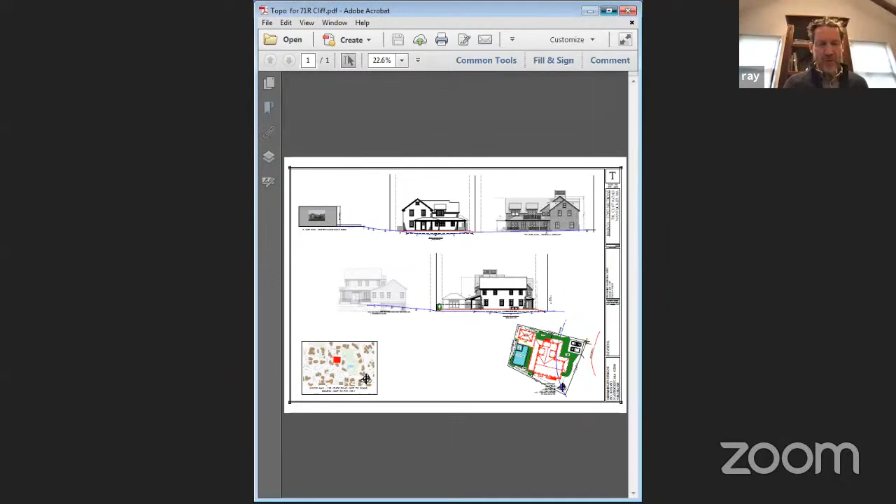Okay, so first thing on the agenda here is the dwelling that we reviewed Tuesday night. And Brooke, I know that you provided some supplemental information, which we received via email. Why don't you walk us through it? All right, need to share?

Okay. So I've never done this before, Brooke. No, I guess, oh perfect. All right. So you've seen the house already.

The information that I brought in is a topo study showing transverse cross sections east-west and north-south. And what you're looking at here is the view from the way, and the blue line represents the existing grade through the property, and then we've got a red line that indicates what's getting filled in that area.

To the right is a drawing, a design that was recently approved for 69R Cliff Road. And then to the left of that is 71 Cliff, which is a small ranch style building that sits up on Cliff Road. And then, of course, there's a bunch of vegetation between those.

And then on the second structure, this is going from east to west, and there again you've got the blue line with the low point being at the 34-foot topo line and rising up, and this is one Hamlin Road in the background, which shows more or less what the grade line would look like. Their driveway is at the 36 topo, and again, the red line indicates where our finished grade would be, which is at the 37-foot topo line.

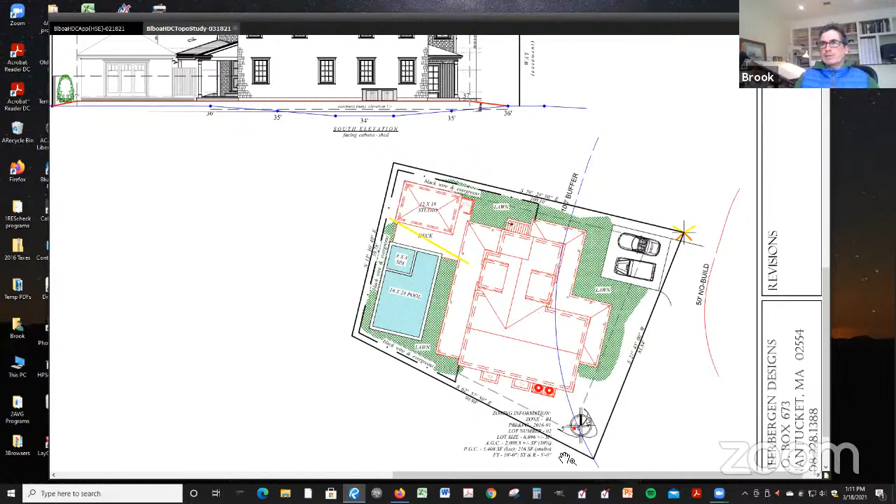I also want to make one more note that when you look at this building in the site plan, it does look like it consumes a lot of area, but a lot of that is covered porch. So if you're standing out here in the way, you will be looking through a lot of this area, and the actual building has a relatively small perimeter. Again, it's 1,400 square feet on the ground, which I think is a pretty modest structure. So that's the topo study. I can leave that up, and I can also go back to the designs as well at whoever's request.

Okay, thanks Brooke, thank you. I'm sure HDC didn't have anything to say between Tuesday and now. So whoever wants to speak on this application before we get it to the board members, unmute yourselves and announce your name for the record, please. That is, if anyone wants to speak on this.

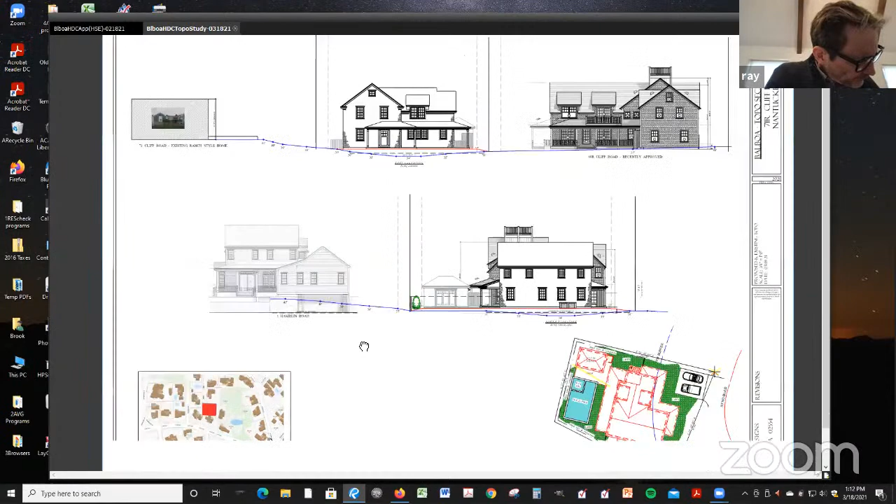Hello? Yes, sir, my name is Heather Lamb. Thank you for calling me. Our house is 73 Cliff Road. You didn't mention it on Tuesday or today. It's pretty - well, I know we're not on the pool yet. Not yet. Okay, so I just wanted to make myself present that I am an abutter and I wasn't on your original list. So thank you for hearing me.

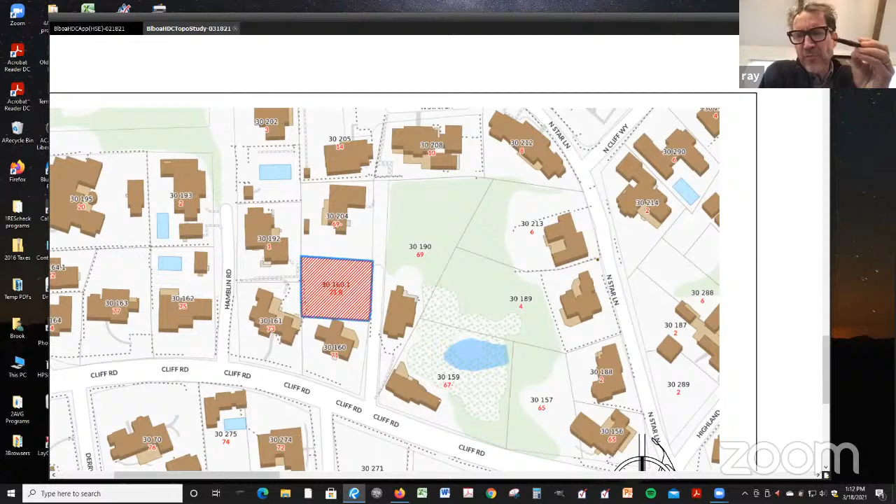So right now we are reviewing the house itself. Then we have two other applications that are following that, the pool being one of them, if that's where your concern is. Thank you, yes. Okay, so we can get back to you on that, okay? Okay, thank you. Great, anyone else?

Mr. Chair, my name is Karen Padilla and I'm an abutter from 69.5 Cliff Road. I'd like to understand the water runoff and how they plan to capture that and take care of that with this new house. Okay, I'm actually glad that you brought that up because a lot of the discussion on Tuesday had to do with runoff, which is something that this board is not in charge of.

We are in charge of grading to the extent that it elevates the house, but in terms of the runoff, that's not our purview. So if Brooke wants to respond to that in any way, I would welcome him to do so, just in the interest of being neighborly.

Sure. So if you look at the topo line, there's really only about a foot difference between our highest point and about the midpoint of your lot. And I think right now the water goes to that wetland anyway. In terms of drainage, that's definitely a question for a soil engineer, and I cannot answer that fully accurately. I can only speak to the relative size of the buildings and the designs within the context of this area.

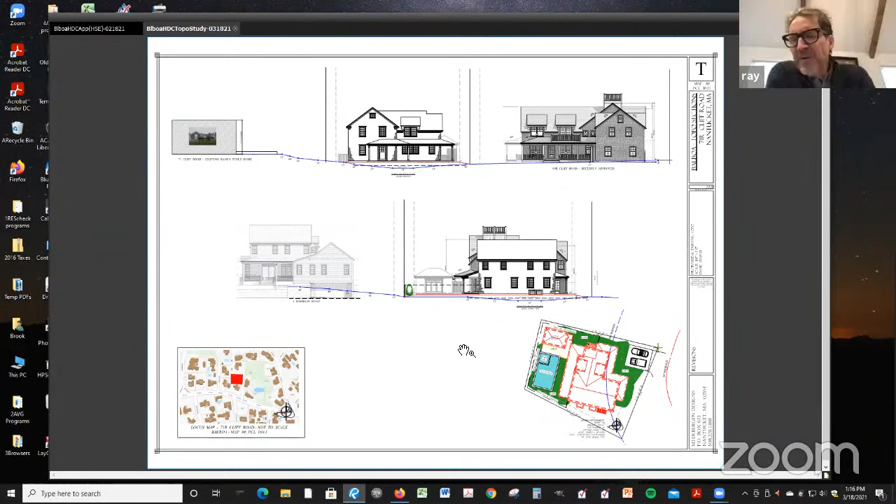Okay, thanks. Anyone else? Mr. Chair? Yes, Mr. Chair. Oh, hi, Arthur. Arthur Reade, representing the Braylowers at 1 Hamlin Road, and also representing Richard Griffin at 69. I would echo what Ethan said, and -- somebody needs to mute, please. Arthur has the floor right now.

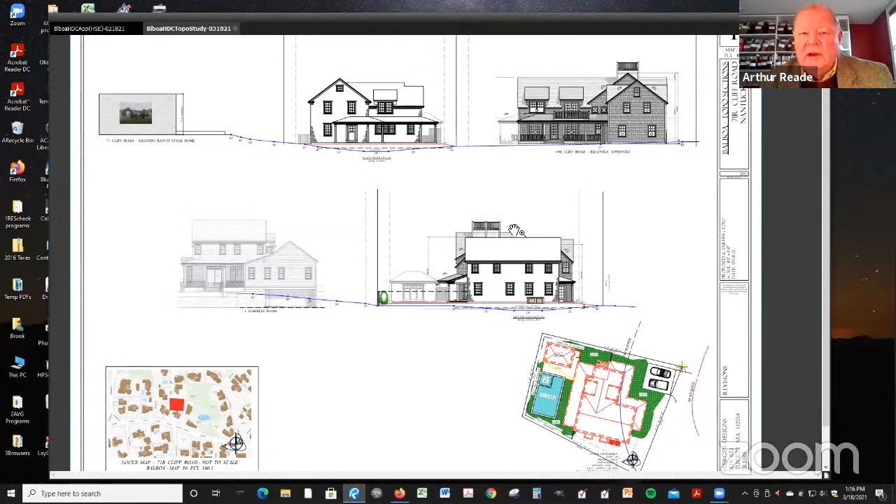In addition, I'm concerned about the grade change. Looking at this, it's not a huge amount, but the grade is certainly being raised, and I don't know any reason why it couldn't be kept at the lower elevation where actually most of the lot is now. If you look at it from either side, rather than building it up, can't we either go to the lower elevation or average it in some way? Is that it, Arthur? Yep. Okay, thank you.

Anyone else? Mr. Chairman, this is Salil Patir from 69.5 Cliff, north of this property. Just going back to your remark about HDC not being the place to raise concern about the surface and roof runoff.

Correct. Where can we raise that concern if this is not the right forum to do it? Well, it would have been the Concom, which is why I raised the issue of the Concom. But like Ethan said, this wasn't really brought up at that point, and this is the first time we are seeing these drawings. But apparently the issue of runoff was raised -- I believe somebody said that.

Ethan, did you say that? Yeah, just to clarify, we did bring it up as one of the points as part of the Concom process, though they really didn't put much importance on it because it was outside the 50, and they felt it was largely between the 50 and the 100. It's not something they put as much concern into, unfortunately. I don't know if it's a failure of the process or what, but again, looking at the boundaries, it wasn't something they really put a lot of concern into. Okay, thanks for the clarification, Ethan. I hope that answered your question, sir.

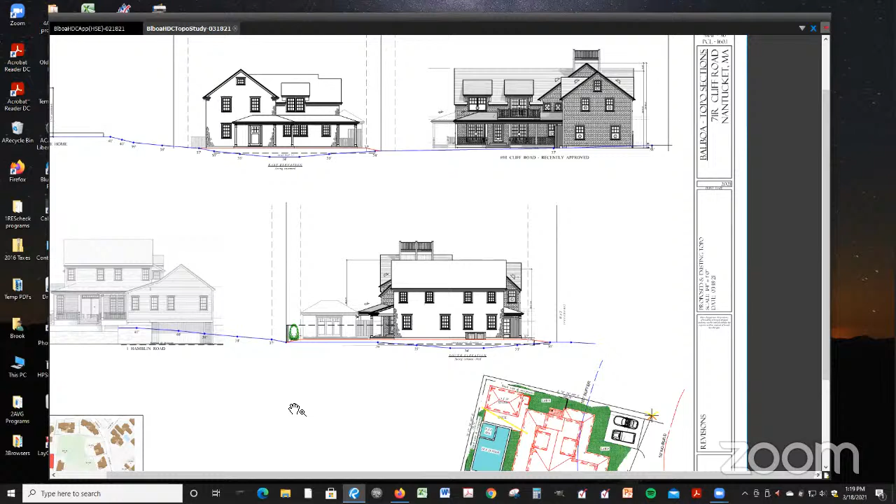Anyone else? Hi, Meryl and Meryl Bralower. I'll share my video. Hold on, let me just mention what we mentioned last time. We think that the scale of this project doesn't fit the neighborhood. And that's all I'll say for now. Okay, thank you very much.

All right, anybody else? Otherwise, we're going to get to the board members.

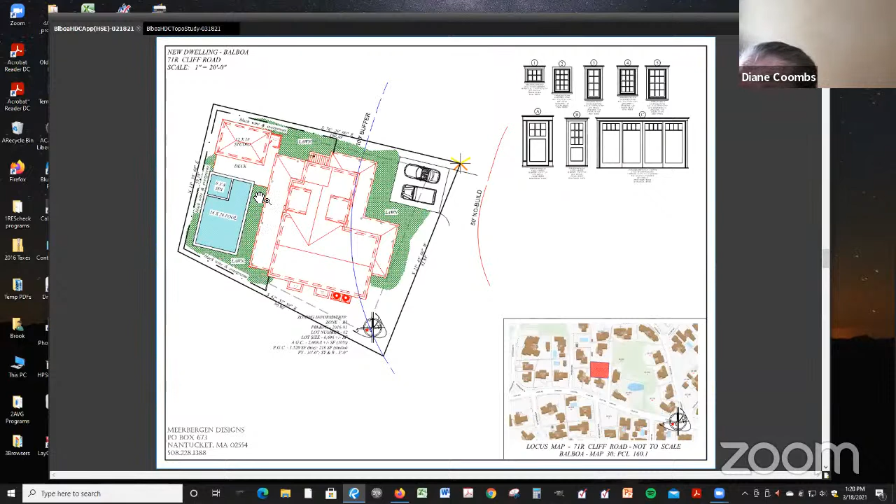Even though the porch is around, we've got the air conditioners, I would guess what those red circulars are. That's what those are. On that, they are very close, they look like, I don't know, 12 feet from the lot line.

I would like to see the pool reduced. I would like to see the studio reduced. And I feel that the main building should go back, perhaps not so much room given to decks and porches. I understand that it's good and they look through, but when you see the amount of land that is left, again, I've been trying to follow the square footage of this, and it comes down to being

almost the full allowed square footage. I would like to see it reduced somewhat, so it's going to be seen from several streets, and it's in a funny corner down a driveway that is a public passing, and we have to consider the house itself is fine, lovely, but it is how and where it is set on the lot that I'm concerned with.

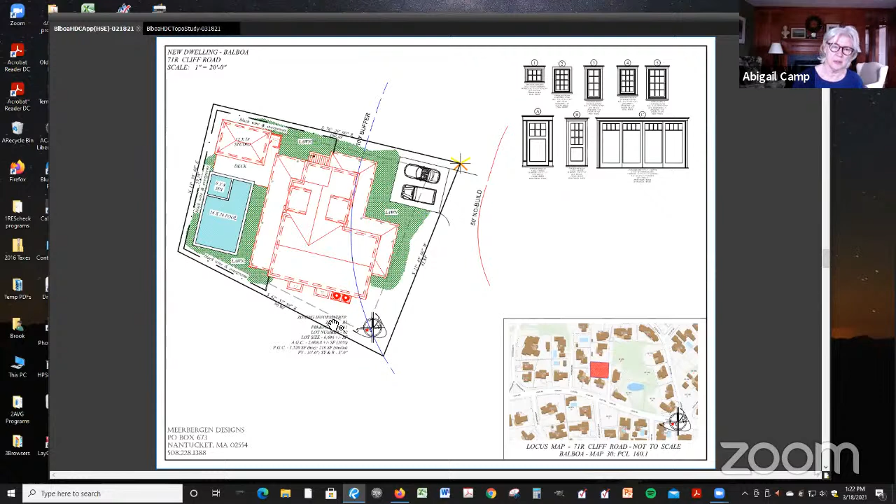So with respect to the architectural elements, sizing and massing, I think the design itself, the fenestration, the general elements are perfectly approvable. However, I think the overall massing is problematic in terms of the setting.

I note that this, as we've discussed, does go almost lot line to lot line. Whereas in the neighborhood, if I'm reading this correctly, 69 R Cliff, which is to the north, and then the homes surrounding really aren't lot line to lot line, although they do come up close to at least one lot line. And I think it would be appropriate for this building to be along one or more property lines, but not to straddle the entirety of the lot.

So that's the overall size. With respect to overall size or perception of overall size, I do agree. I think there was a general comment made yesterday about the grading. I'm not going to speak to water runoff because it's simply not our purview, and it's problematic when we talk about things that aren't in our purview.

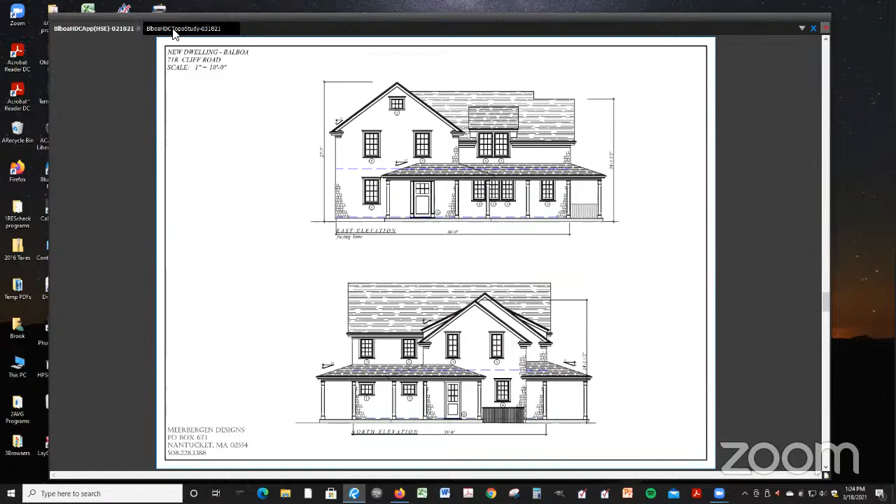But I do believe that if 37, it looks to me that 37 is arbitrarily somewhat chosen, perhaps with respect to beneficial water runoff for the particular property. But it would seem that 36 would be just as appropriate, allowing a little bit of retainage along the southern end of the lot, if I'm reading these documents correctly.

Dropping this down a foot would help, I think, as a trade-off with respect to keeping the overall massing as it is, at least in my mind. That's a foot off, and I think that's beneficial. And I think those are my comments for now. I'm not going to speak on the pool, the cabana. I think they're incidental.

Thanks, Stephen. Gary. I agree with the other commissioners to the extent of the architecture. I think this is a perfectly appropriate building style. I think the massing could be reduced a little because of the lot size, because of its location centered where it is. But architecturally, I have no issues with this building.

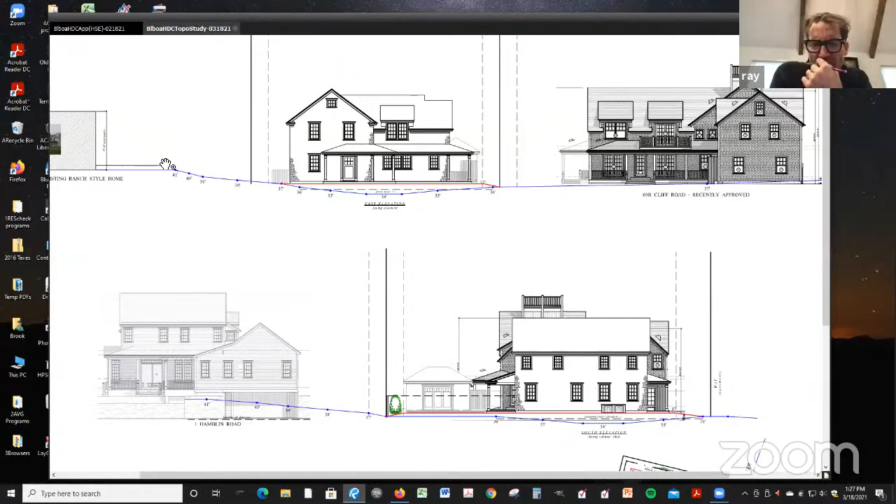Can somebody make a motion on this one? Make a motion to hold for revisions. Thank you, Diane. On that motion: Abby, aye. Stephen, aye. Gary, aye. Diane, aye. And I'm in favor. Motion carries.

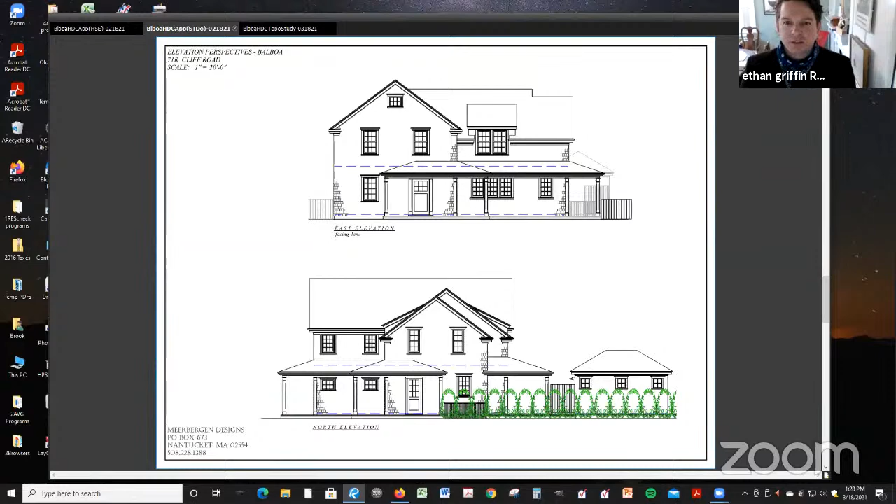Anyone? Ethan Griffin: I think this is a completely fine cabana studio. What's going against it is the overall density of the lot. Anywhere else on the island, beautiful, it would probably go on consent. But just on this site, it's difficult in comparison to the rest of the development. Thank you, Ethan.

Anyone else on the studio? Go ahead, Merrill. I agree with the commissioner who suggested a shed. I think that's much more in keeping with this particular lot.

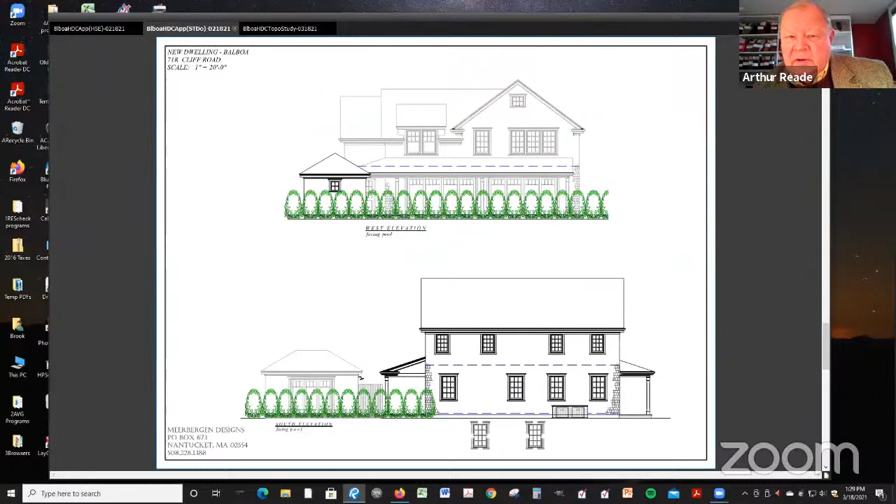Go ahead, Arthur: I have the same comment as both Merrill and Ethan, in one way or another. There's nothing wrong with the structure per se in a vacuum, but when you apply it to this lot and the extent of the very aggressive program being proposed for this very small lot, I think it's a bit much. They're basically trying to cover the entire lot, or as much of it as they can. I think it could definitely be cut back to the shed that I assume it's really intended to be, for purposes of maintaining the pool and equipment.

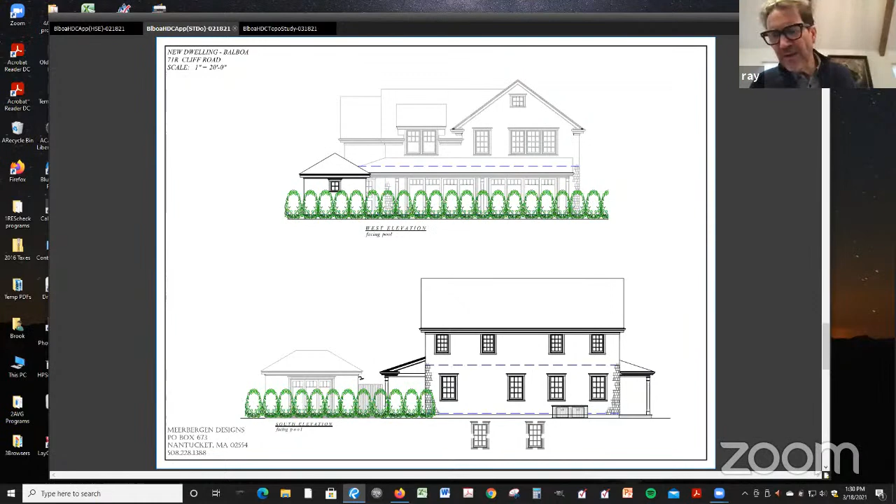Thanks, Arthur, anyone else? Okay, I'm going to turn this over to the board. Interestingly, whoever made the comment about it being a shed—I immediately jumped right to zoning shed, as we know it, which means it's exempt from ground coverage and can be no more than 200 square feet, which I think this is slightly above. So who would like to start the discussion on the cabana?

I'll go, Mr. Chair. My only comment is I think it's perfectly approvable. Given our purview with respect to setting, it's such a small building, and with the hipped roofs it's not so imposing, so it would be appropriate. I do think it would be beneficial—these are probably 7-foot doors—to take 4 inches off the top, or lower the top plate a little bit. I do think the south elevation, although not visible, shows the door heights look a little out of proportion. And on the east elevation, which may be viewable at some point but perhaps not if there's fencing, the door height is masked by that outdoor shower element. Those are my comments.

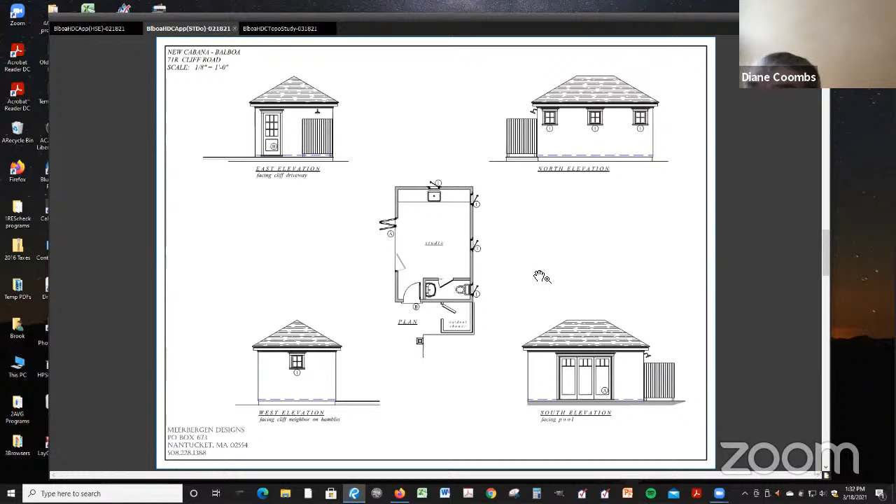Thanks, Stephen. Diane, are you ready? You'd already made some comments about the shed—why don't you reiterate those? I would like to see it at shed size. I think the zoning shed size is certainly a concern. The south elevation and north elevation can be less wide. It's supposed to be a john, a sink, and I don't know what else except sliding folding doors. The building needs to be made smaller.

Those are the sides that can be done. The window there is fine, it goes underneath, and the bushes cover the lower part that has no windows in it. But I would like to see it made smaller, or go to a zoning shed.

Okay Diane, thank you. Carrie? Sorry, I was muted. I think I agree with Stephen's comments about the doors. It makes it seem a little bit disproportionate with the size of the building. It is a small building, but the zoning shed can be 10 by 20, and nobody would want that, because I think this is 12 by 18.

Is that right, Brooke? It could be 12 by 16, and that would meet the letter of the law for a zoning shed. And it would be easy to drop the plate height and drop the door height, and I don't think that would make much of a difference - some nuanced deductions, but I think it would help. That's all I've got.

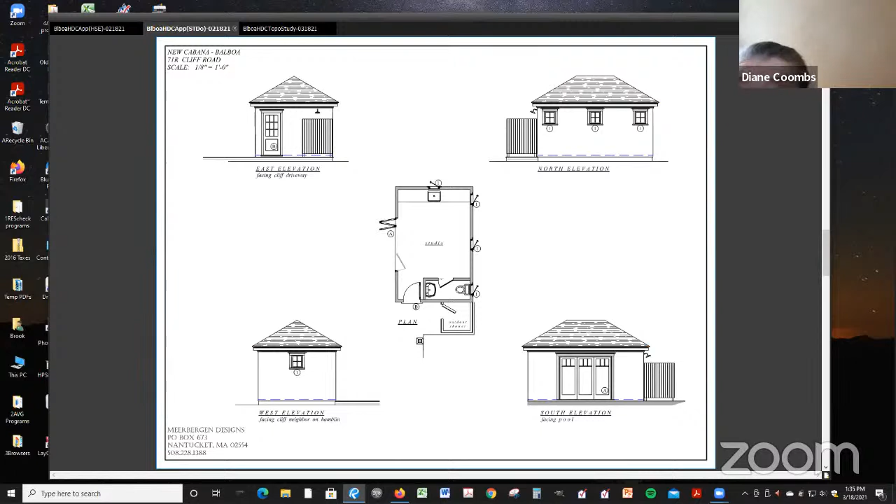Now let's look at the pool. I'm not sure that you need to go into any great length of description of the pool, Brooke. No, it's a pool. There you go.

At grade, right? At 37? It was grade 17, I would guess, right? 37 is the grade - 37, I'm sorry, 17, 37, 20. I think we negotiated down to 36. 36 and a half, that was the negotiation. Wait, did we say 35? 36 and a half, Steve.

Okay, so Brooke has given the briefest description ever of his pool application. So now I'm going to open it up to neighbors, and I know one neighbor in particular wanted to speak. Was that Heather Lamb that wanted to speak on the pool specifically? Yes, thank you so much.

The pool lines up right along our whole property line, and our house is the smallest of all the area. It's worrisome that it's 5 feet from our property line, where we get together every night, cook out, deck, all that. I know I can't bring up drainage because you don't consider that, but the closeness to the property line and our house - it would be about 10 feet from our house.

So that concerns me. You're at 71, correct? I'm at 73. Oh, 73, I'm sorry, I was confusing you with 71. Sorry about that. Okay, so we have a very small, where your arrow is, very small little grassy plot there, and that's where the side of the pool is, and I gather it's 5 feet from the property line.

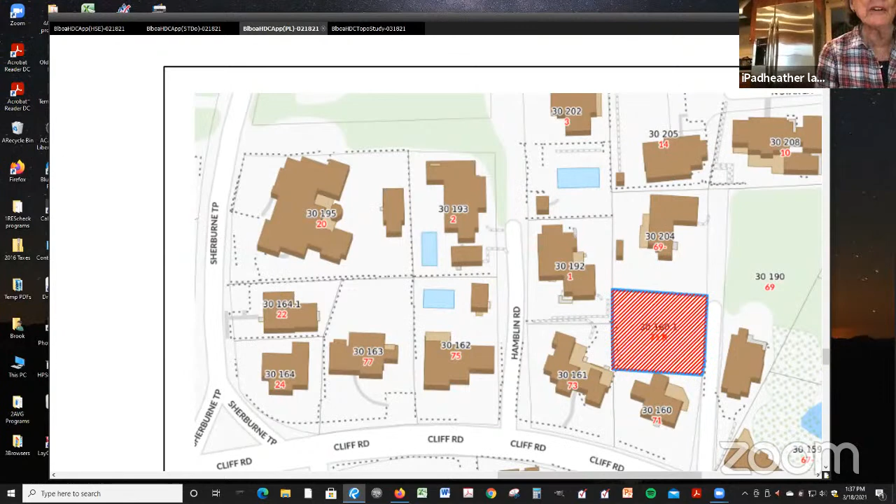It is at the moment. Okay, so that's what we would look at too, every night, every day, and hear noise - noise always travels from a pool. And also our house is the lowest house of the point all around. We have major - I know I shouldn't say drainage problems, but we flood all the time. So that obviously all worries me.

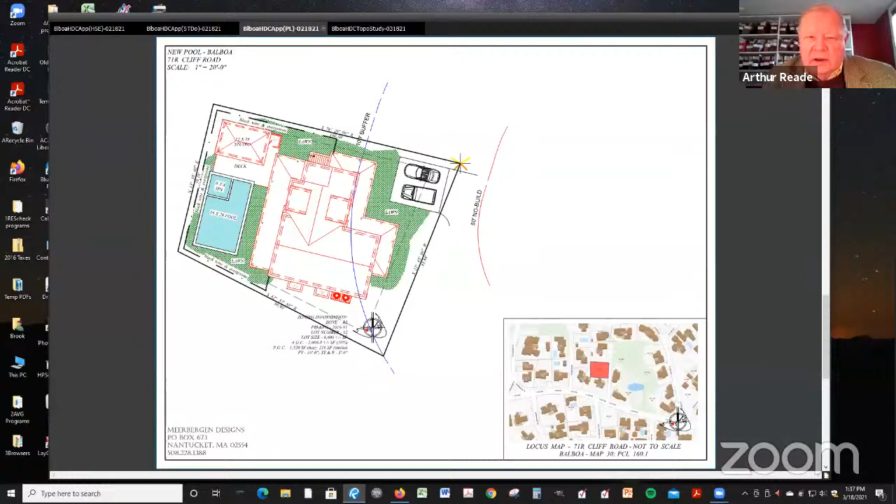Thank you, okay, thank you, Mrs. Lamb. Anyone else? Yes, Arthur - again, representing the Braylowers who are at 1 Hamblin Road. As you can see from the site map that was up a minute ago, there's a clear shot view from Hamblin Road between the Braylowers house at 1 Hamblin and the Lamb house at 73, shooting right up at the pool.

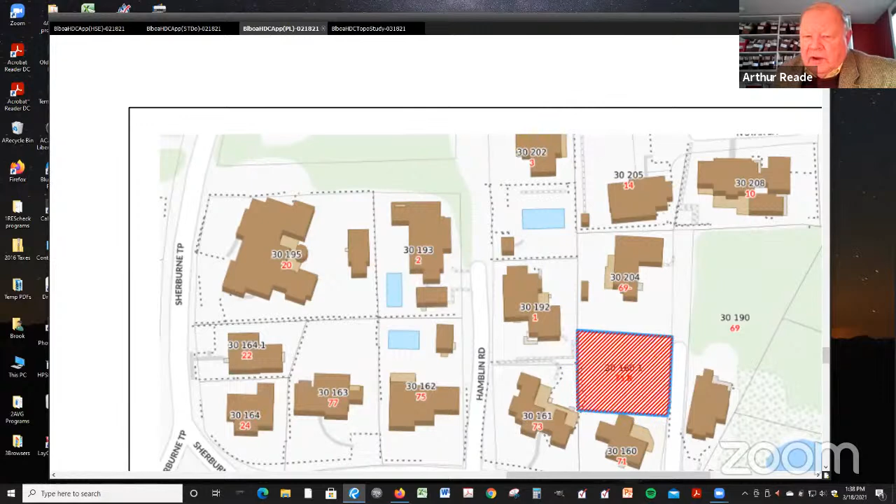It's going to be highly visible from that point, and I think my clients, as Mrs. Lamb, are also very much concerned about the effect it'll have on them. But I think it'll also have visibility and an effect from the way, Hamblin Road. And it's a large pool, up very close to the lot line. Again, as every other aspect of this project, it's just a little bit over the top for this little lot.

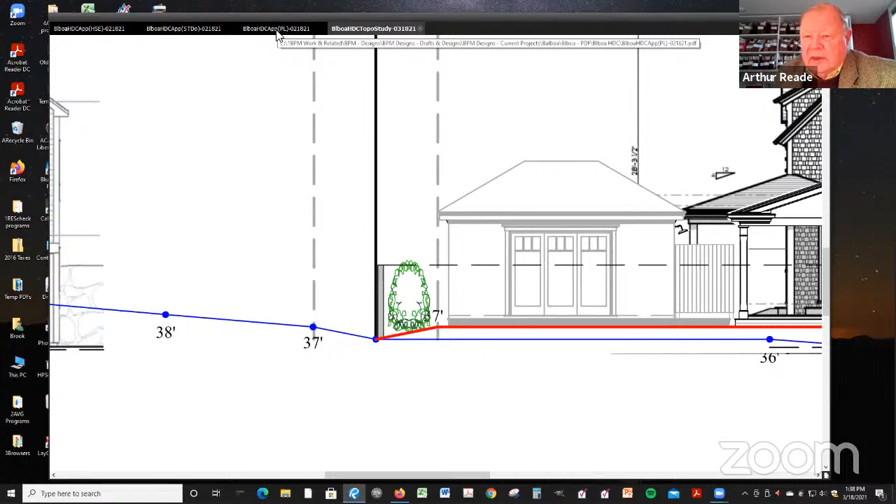Anyone else? Mr. Chair? Yes, Ethan Griffin.

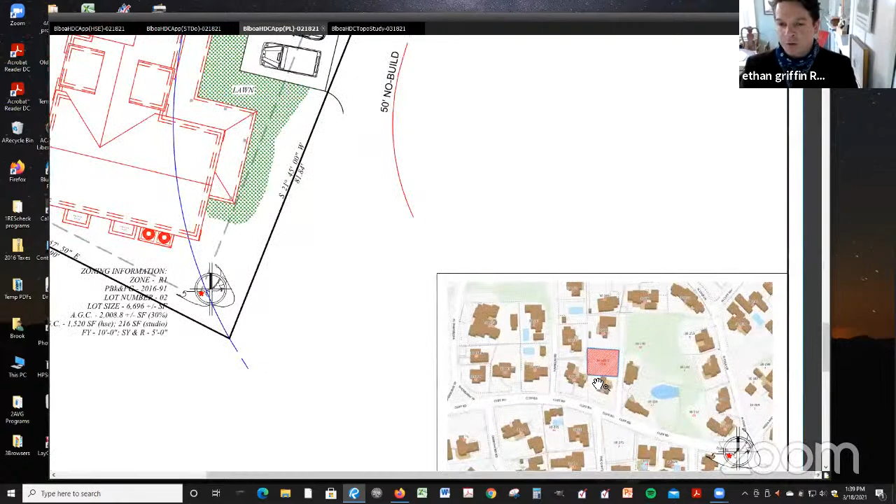I think what's also particularly illustrative about the locus map that was just up is examples of, certainly there's other pools in the neighborhood, but again, looking at the proportion of those pools to the size of the lot, to the size of the main structure and the accessory structures, I think that should establish at least a sort of a design baseline for appropriateness that the applicant might want to look at further.

The only thing I would add is that during construction, we would be very appreciative of having some kind of construction fence, as I'm sure the other neighbors would, because it is so close to our property and to everyone else's that all the debris and difficulty from setting something up on that smaller lot is going to impact us dramatically. So that would be one thing we would ask you to consider.

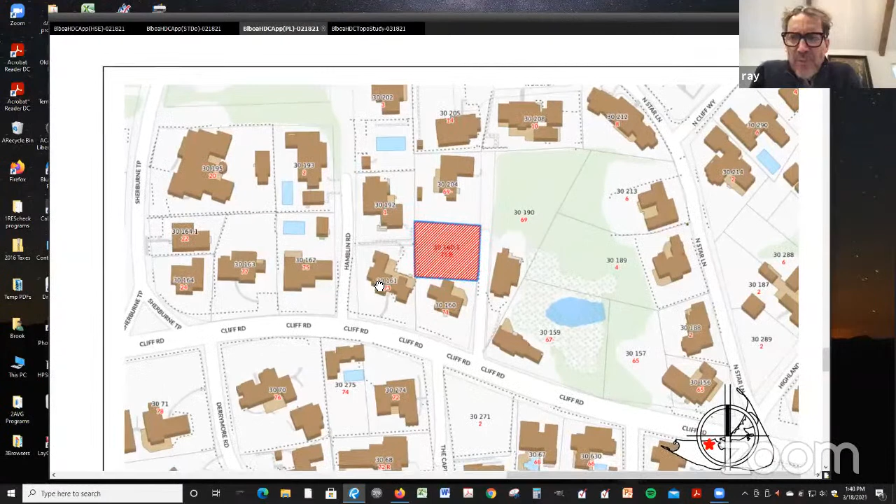Well, that's not our purview, but I can tell you, I'm in the business. I'm an architect, and if you're digging a pool or a foundation of any kind, the first thing any builder is going to do is put up a fence, so that the liability of somebody falling into that excavation is reduced. They need to do certain things per OSHA to keep the site protected from things like that happening. So I guarantee you there's going to be a fence up there probably throughout the entire process of the construction.

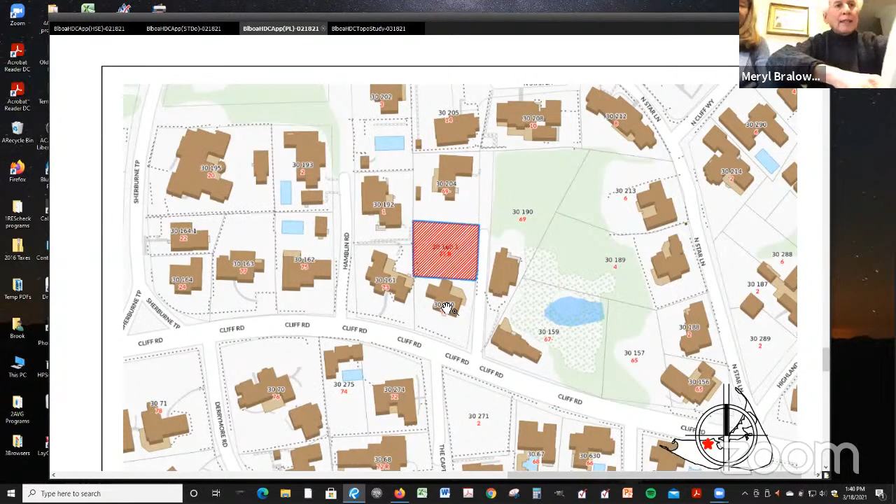Meryl Bralower: I would just like to reiterate, again, that the size of this pool relative to the lot seems inordinately large. And I think the whole lot and all the various buildings on it have to be taken into consideration in terms of scale. And if anything is totally out of scale, it's the size of the pool compared to the other two structures.

I have one other question. On the plans, they mention a hedge of evergreen trees behind the pool and the studio, and then some sort of black fence as well. Is that in your purview as to what's going back there? Yes, it is.

So I'd like to know a little bit more about what they're planning in terms of protection from the pool itself for abutters and any grandchildren or children, et cetera, and a little more discussion of what they're planning on using in terms of the type of trees, as well as what kind of fence. I just mentioned a black wire fence — whether that's going to go outside the trees, or inside the trees towards the pool side.

So some of that I can answer for you right off the bat. The wire fence, which is a requirement for code unless you have a pool cover, which I won't get into, is 4 feet high. It's hidden in a privet hedge, which presumably this would be, and goes on the inside. So it's not next to your property, it'd be inside of their property, and you'd have a hedge between the fence and you. But the rest of it, perhaps Brooke could address.

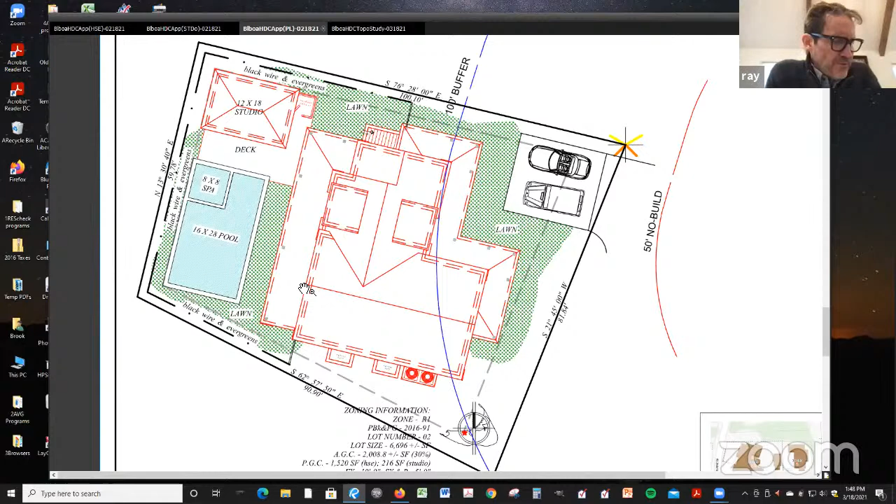Carrie? I'm in complete agreement with Stephen, I was thinking that myself. If you can rotate it, reduce it quite a bit and rotate it, you could preserve a whole corner of the property to buffer from your neighbors. And I think with a fence and evergreens, it will be screened nonetheless from Hamblin. But that's it, nothing to add.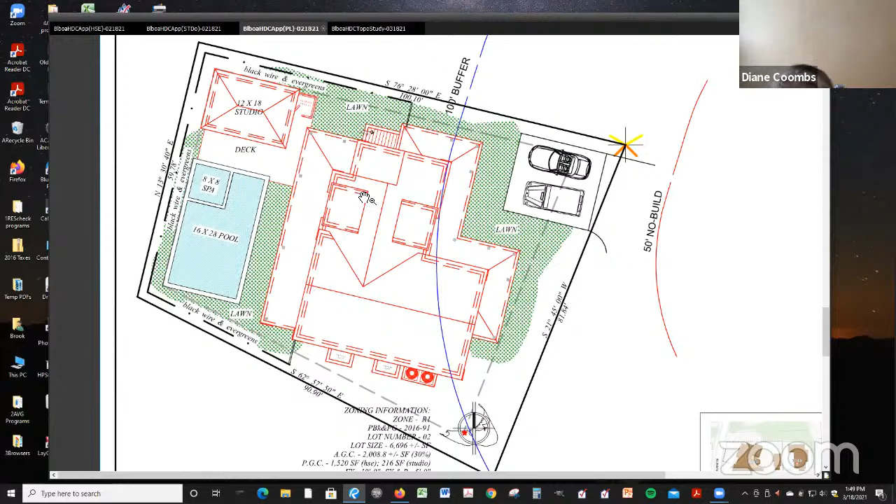Can I have a motion? Motion to hold for revisions. Oh boy, well weren't we charming? We're going to give that to Abby's motion. So on Abby's motion, Diane? Aye. Thank you, Stephen? Aye. Thank you, Carrie? Aye. Abby? Aye. And I'm in favor. That motion carries. Thank you, everyone, for your comments, we'll see you next time. Thank you, Brooke. Thank you.

Okay, moving right along, we have Mike Duffy. Is he with us? That was Michael missed Tuesday night. Yep, Michael, Mr. Chair, are you with us? Yep. So you have 2 strikes against you so far. No, I'm here, Mr. Chair. No, but you weren't here Tuesday. Oh goodness, yes, Tuesday, yeah, I do sincerely apologize. Shame on you. Okay, so let's see what you have.

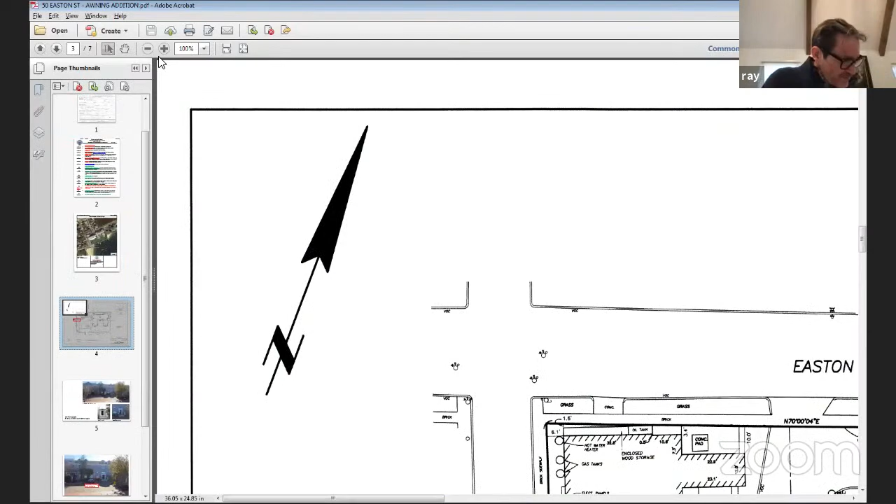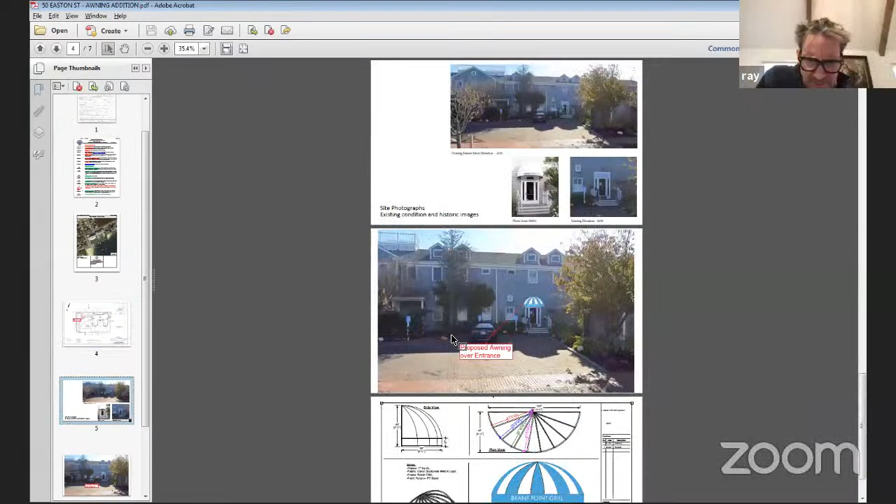Okay, 50 Easton Street, Awning Addition. Go ahead, Mike. This application is for an awning at the entrance to the Brant Point Grill. We have an existing photo from the street and a photo from the 2000s which shows a similar type awning, half dome style. In this instance, it was all white. The proposed condition is a two-tone blue and white striped awning.

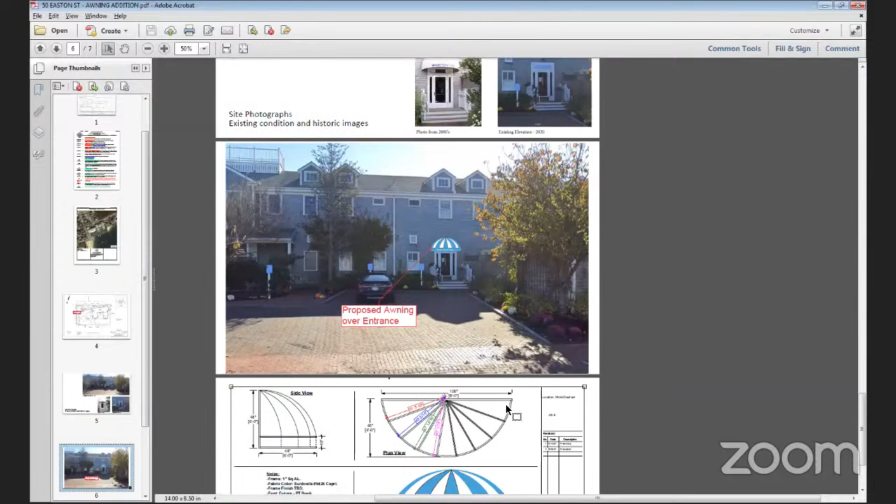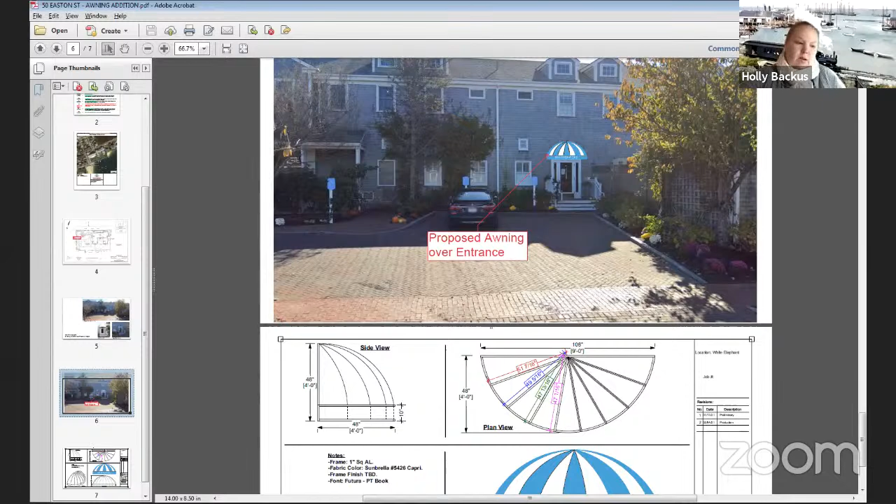So do we have HSAB on this one? Yes, Mr. Chair, we do have HSAB comments. They took a look at this on March 1st. Their comments were that it was not architecturally appropriate with this proposed style, not round. There was a suggestion possibly with a shed roof type of style. Also, they would prefer a single color, not in this blue and white scheme, and if it was a single color, not blue. Those are the comments, Mr. Chair.

Okay, thanks. We're all on these for the duration until we get a conflict. Okay, who wants to start?

I'll go. White Elephant to me has always had sort of a 60s style to it. It's not a historic approach to architecture. They have that big white elephant on the property, and I remember the Harbor Room. It's always been a little bit of that, so because it already has that history of style, I'm okay with this because it kind of goes along with that happy-go-lucky, fun, old Nantucket 60s feel. So I'm okay with it.

Okay, thanks, Abby. Diane? I don't mind it in white. I'm not sure about the blue, I guess I would like to see the real material being used for the blue. It was in the 2000s that they had the white. I'd like to see if they have a proposal for the blue. The blue that's there, the one showing up in the rendering, is not to my liking. It's a little electric, turquoise.

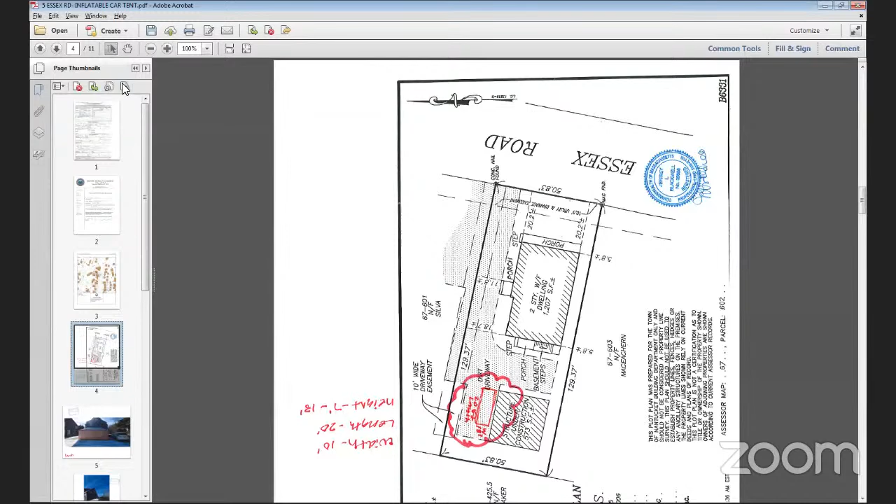Mr. Chair, we do. Hello. Oh, hi, okay. Hold on one second, I want to establish the board on this. Now that John is with us, we're going to alternate the associates. So I would like Stephen to sit on this one, if that's all right with you, Stephen. Yes, sir. Okay, so sir, are you Ronnie? Yes, I am Ronnie. Okay, Ronnie, why don't you tell us what you'd like to do, and then you can hear from the board.

I put a tent maybe a year and a half ago, because I have a mice problem that was eating some of the wires inside my car engine. It's a car that I only use mainly on the weekends when I go away in the summer. I've got my work truck, but I use it every day, so I didn't have a problem with that. But the other one that just sits there, that's why I got this tent that is inflatable, so it seals the whole vehicle from anything coming underneath it, and that's why I put it up.

We have a little problem with our neighbor next door because of an easement issue. He started complaining about the easement, so we fixed it, but then he complained about the tent, and that tent has been there for a year and a half already. That's why this came to your attention now. I see, okay, thank you for the explanation.

Sure. Now we're gonna put it to the board. Who would like to begin on this one? I'll start, okay go ahead Abby. Somebody needs to mute out there. Thank you, go ahead Abby. Usually with stuff like this, if it was temporary for 6 months, it would be maybe okay. But to make it a permanent structure, I'm not sure what his intention is, but I think this is something we would not want to make permanent.

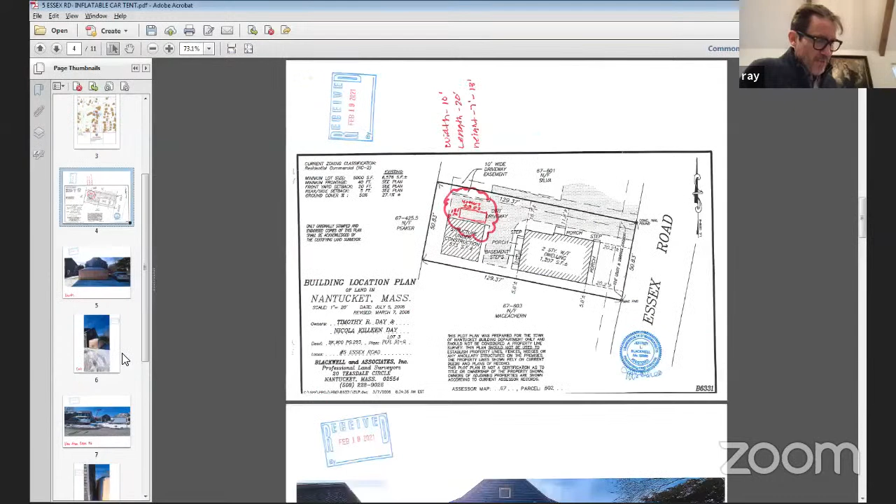I would go with it first for the length of time requested and then removed. Yeah, our approval is only good for 12 months. Fine, okay, yep. So you're on.

Okay, thank you. Abby? It's just a little too long for me. If it were in my neighborhood, I wouldn't want it. So I'm a no.

John? I have to go along and approve it because it's not atypical to Nantucket. They had tents back when people first settled here. So it's just how much visibility you have, and there's very little visibility right here from this photo.

Thank you. So you're in favor of the motion of 12 months, I believe, John, correct? Yes, I am. Okay, very good. Stephen, on your motion? Aye. And I'm in favor, so that motion carries. So Ronnie, you're good for 12 months.

Okay, all right sir. Should I try to come by and grab the paper for that permit for 12 months? Talk to Kathy, our administrator, about that, okay? Because I know the neighbor is going to be asking for something, if I got approved or not.

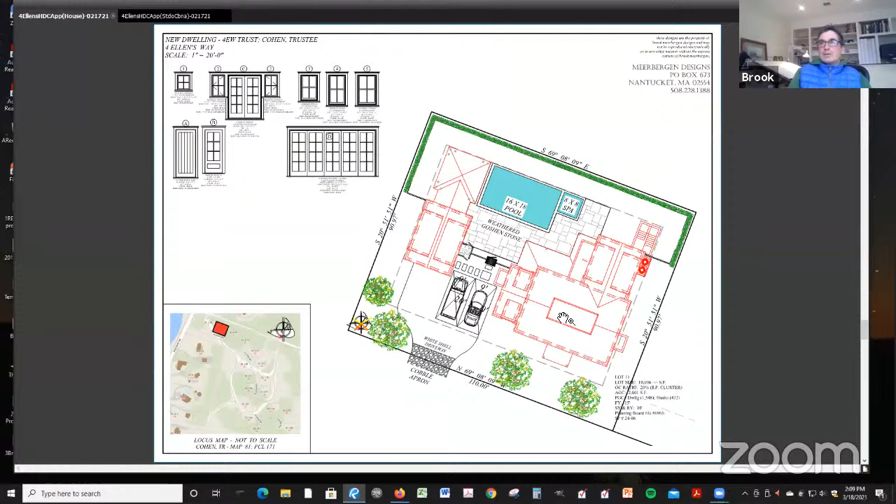All right, so site plan again, it's pretty self-explanatory. And let's see.

All right, so this is the elevation facing the street. And I also have a set of elevations that show it relative to the studio, which I'm going to flash to right now, just to give you a sense of the scale. I guess that's it. I mean, it all seems pretty straightforward to me, so have at it.

All right, thank you. Who would like to start on this one? I'll do it. That was you, John, right? Yes, thank you. Okay, go ahead. All set? Yeah, go ahead.

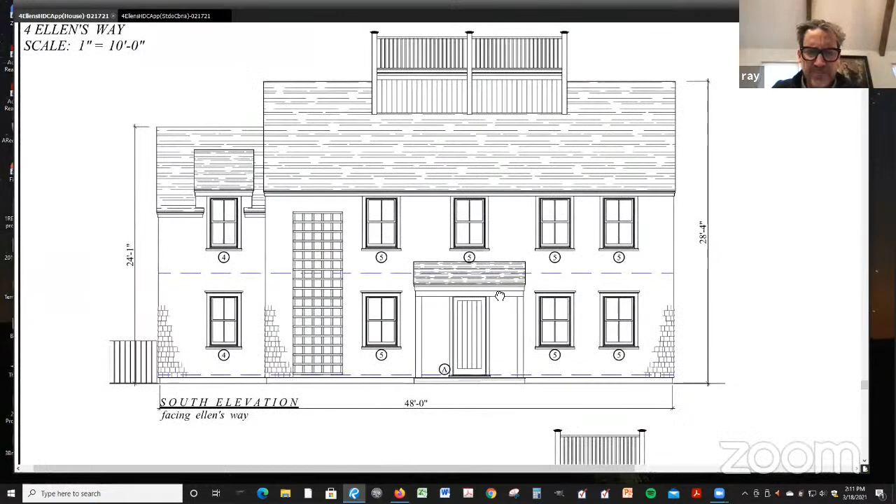Okay, could you go up 3 notches please? Site plan, or he wants it blown up. Oh sure, yes. So there's the front, that's fine. Down to the other elevations.

Okay, the lattice work right there facing Ellen's Way, I don't find it objectionable. It's part of having a nice garden and flowers. So I want to go on to the roof walk.

Years back we had a strict policy here: no roof walk to cover more than a third of the roof. I don't know what this measures out here, but that's a little problem. It looks awful wide for the size of the roof.

Thank you, okay John, and you're correct - it's 1/3 of the roof plane, which this exceeds by some couple feet. All right, thanks John. Let's see, Diane, are you ready?

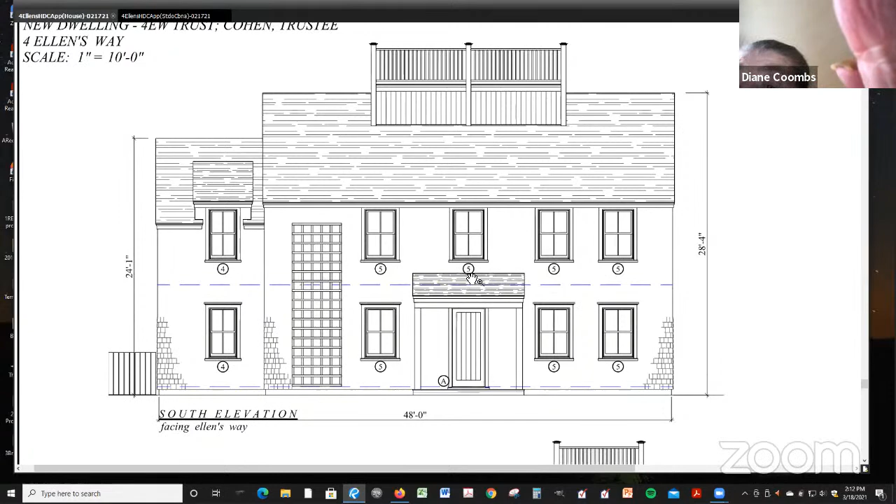Yes, I'm ready. Okay, go ahead. I agree about the roof. I also agree, and I'm surprised he didn't catch it, that the windows in the shed dormer need to be pushed up so their middle line is equal to the eaves.

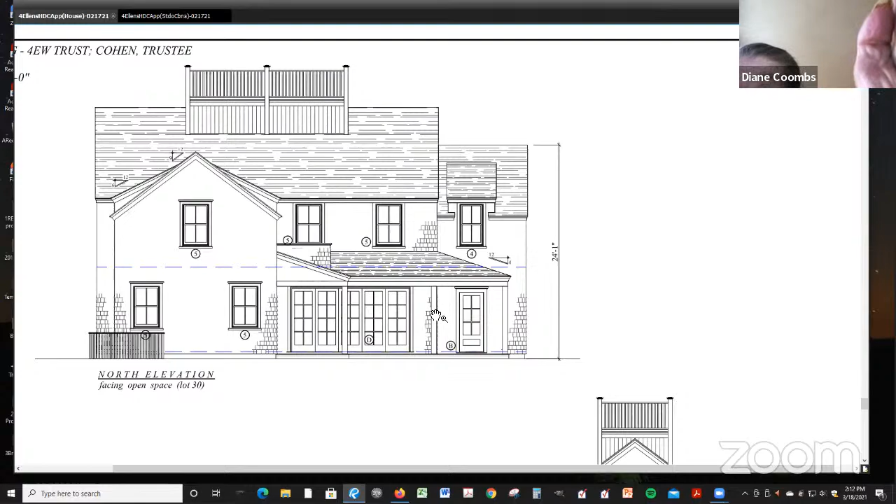This is true all the way around, and it's a silly thing to request, but the trellis that he has on the front, I would love to see that brought down to the size of the windows and not go shooting up into the second floor windows. To me, I don't know why, but it really is annoying, the height.

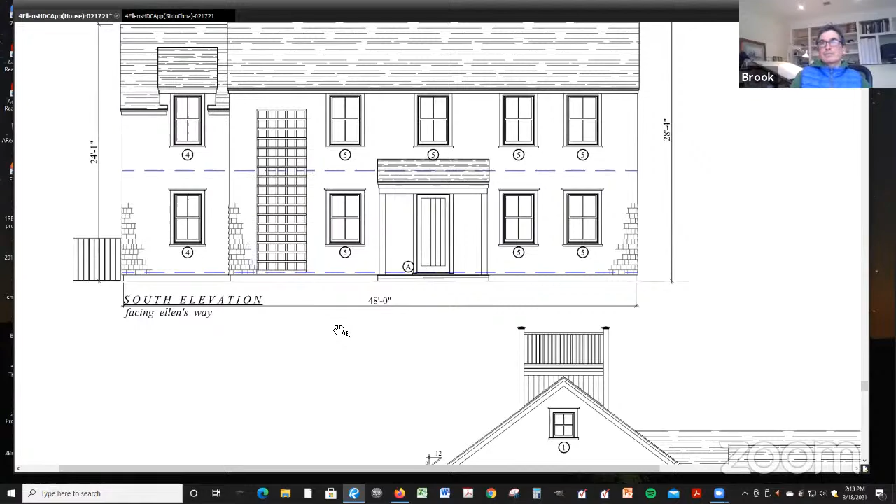So you're thinking something like this area? Yeah, yes. Okay. Keep going, Diane. That is about it.

I've mentioned the roof walk, I've mentioned the windows in the dormer, and the only other thing I could say is on the south elevation, the front door should have just one more set of trim around it to say it's not the garbage door, but the front door. Right, good point.

Okay, thanks Diane. Abby - and a doorknob. Can I see the site plan please? Yes.

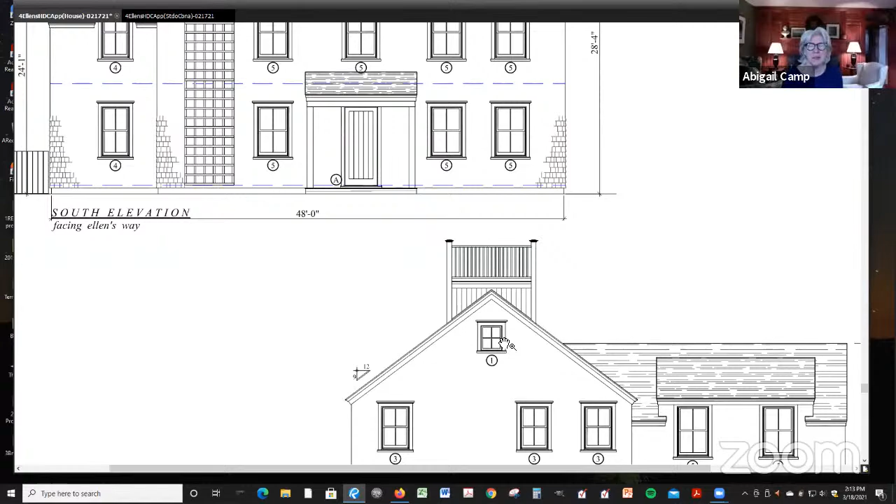So my question is, the front of the house is on the far right there. Is that, well, where's the front of the house? Right here, between those two trees. Okay, so I don't quite understand. I know I like to think of things as a whole, because if we start picking apart... anyway. So you've got the two cars pulled in. What is that apparatus between the garage and the, what is that? That's an arbor. A moon gate. But is there any vegetation with it? There's a fence between that acts as a visual block to the pool.

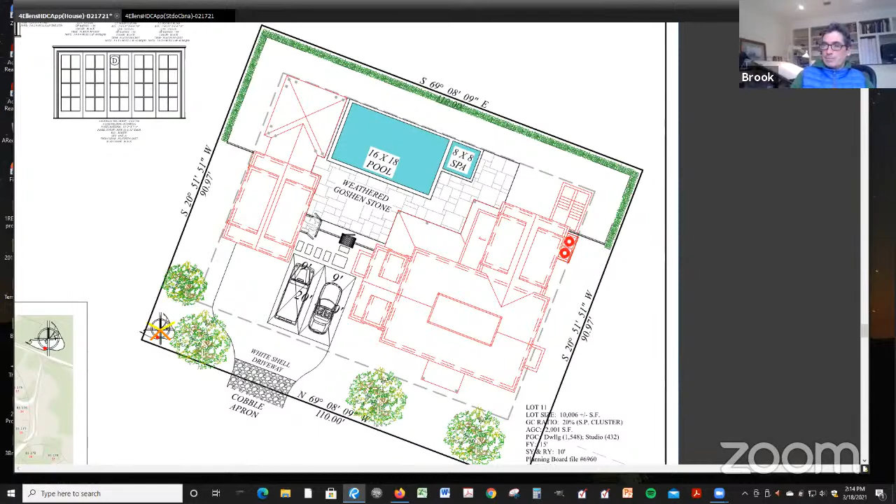Okay, I forgot, I have one more set of elevations to show. Forgot about this, and that shows all the adjacent sites. Yeah, I'd like to see that. There it is, I see it in this very small way. So I think the fencing is a little over the top.

I think, okay, so it's again like a really packed in, what's it called... I'm fine with the architecture, and I know that's what we're supposed to talk about, but the agenda is very packed in, and it's starting to look cookie cutter, and I don't like that. I don't have a problem with the architecture itself, I think it might be... I'm sure it's the same height as all the other ones on Ellen's Way. I'm sure it's not suddenly a story and a half, is it?

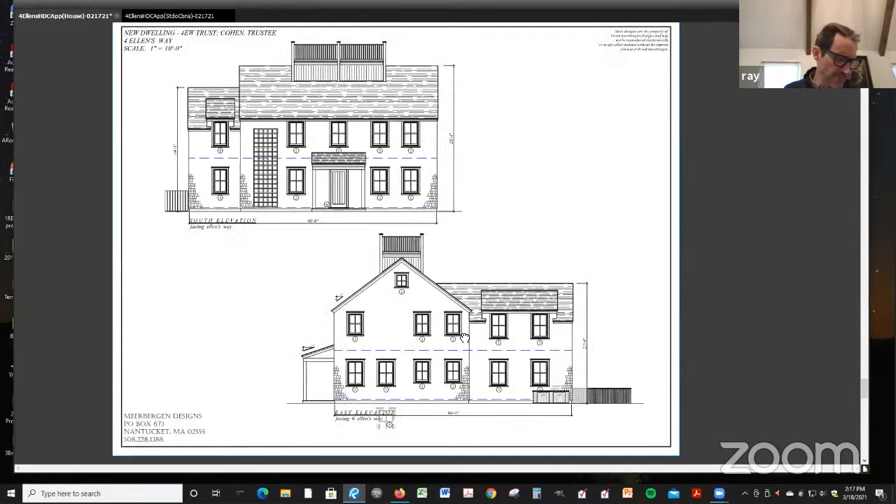My instinct is that this is a 5-bay. That's right, the fifth bay is gone, and that is driving me crazy. Thinking you should try for a 4-bay, because a 5-bay is quite large in this neighborhood where things are a bit scaled down, at least massing wise. And maybe if you made it a 4-bay and reduced the huge roof walk, and the left-hand mass were to take up the space you're losing on the end of the 5-bay, you might have a better massing and a little bit smaller scale. Because the 5-bay without that 5th bay is weird to me. It's not working for me. Sorry, that's all.

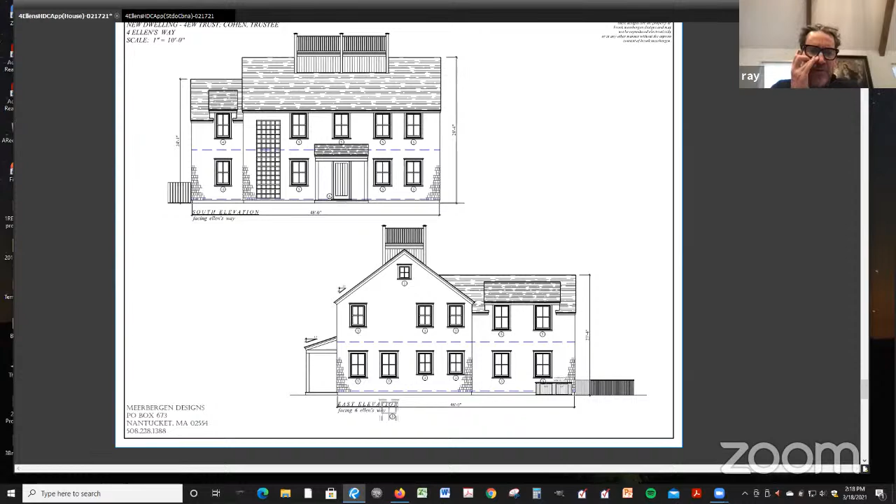Well, Carrie took the words right out of my mouth. It's set up, the front door is centered. And interestingly, in that panorama you showed us, there was a 4-bay right next door, which I believe was much more successful because it was an honest 4-bay, and this is, as Carrie just said, a 5-bay where the first bay has been removed in favor of a shingled wall with trellis on it. So I'd like you to work on that one. That would be my biggest, probably only concern.

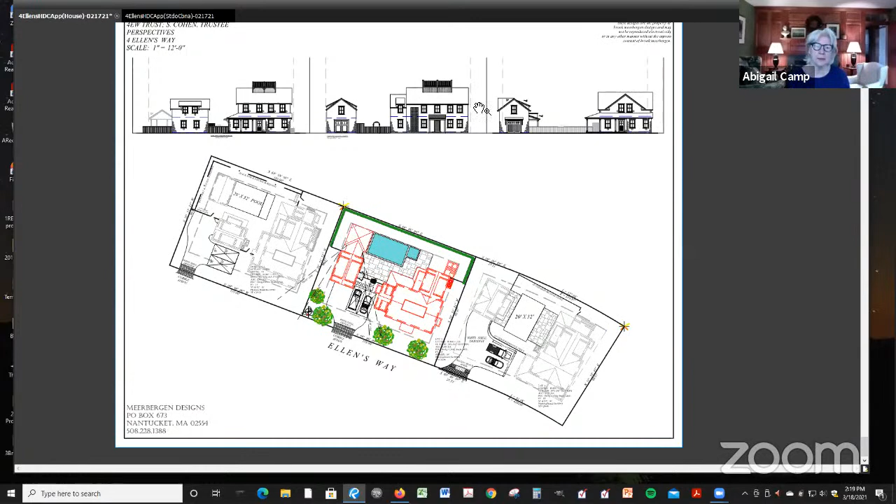Can we have a motion on this one? Motion to hold for revisions. All right, thanks Abby. On the motion, Diane. Aye. Thank you. Carrie. Aye. Thank you, John. Aye. All right, Abby. Aye. And I'm in favor. Motion carries. So do we want to look at the garage studio?

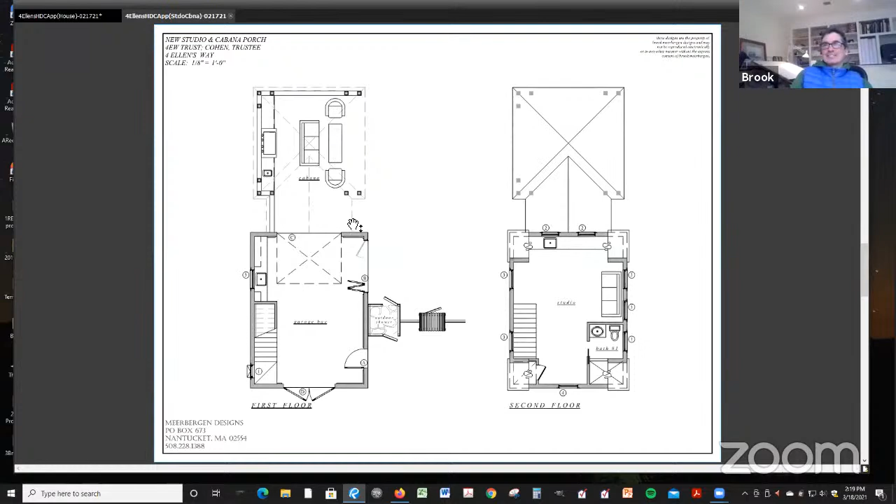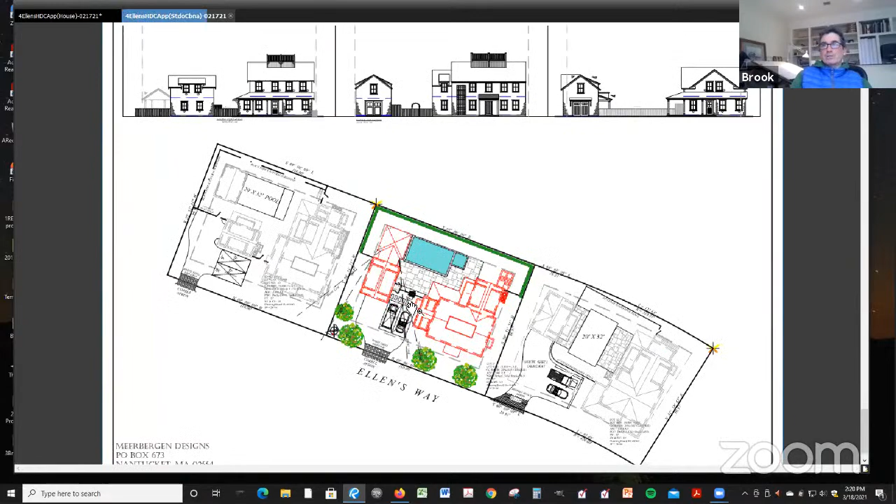So let me, you've seen these and you've seen this, but I want to zoom in on some sight lines from the corner of this building, and from here and here. So it's minimally visible in this direction, if that's a concern. And then of course the back area is lot 80, the open space.

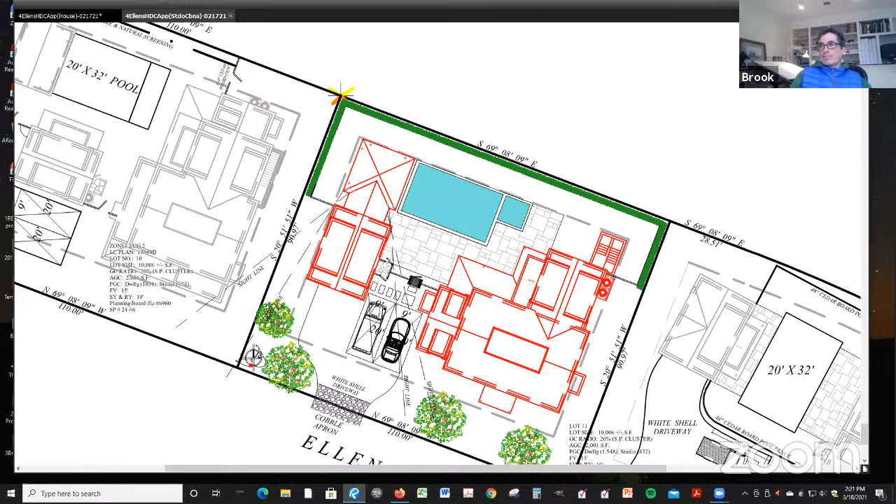I think that's it for now. Okay, thank you. Would you like me to go to the elevations or keep it on the site plan? Let's go to the elevations. Okay, thanks. Who would like to start?

That was Abby? I'll be really quick. It's too much for me - the height, the size, the massing. If this were on an acre lot with breathing room around it, it would be absolutely 100% perfect. But I'm starting to get a tiny bit claustrophobic from these overly developed sites. But thank you.

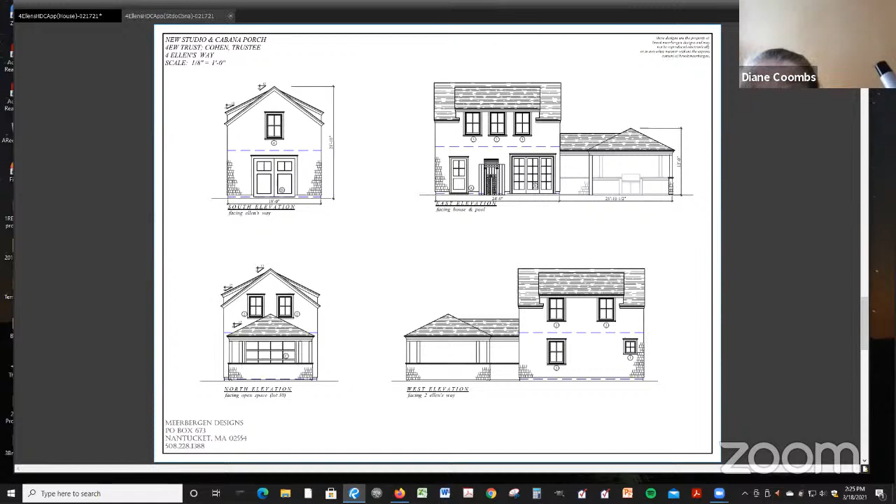Sick of looking at pools, I believe. No, we have 5 minutes. I'll do it, Mr. Chairman.

What's that? I'd say I'd like to do this one. You'd like to chair this one? No, I have comments for this one. Oh, okay, I thought you wanted to steal my chair away. I'll make it quick because what you see there, you see 15 more in that subdivision. So I don't think there's anything too much here that has to be changed. We just, okay.

That's a nice view. There are a lot of pools in the neighborhood, no question about it. Thank you, John. Diane? I would like to see the pools either slightly smaller or the 8x8 spa put inside the pool. No, it's not visible. Correct. Thanks, Johnny. All right, so Diane, was that it? Pool smaller or incorporate the spa into the pool?

Yep. Okay, thank you. Abby? Are we talking about just the pool or the hardscaping? Actually, I believe we should incorporate all the hardscaping, right Brook? Correct, that's what you're requesting. Yep, yeah, so go ahead. I'm trying to... I don't know what's wrong with me. It's just too much hardscaping for me. And I hate to keep repeating myself, but it's almost, again, there's almost no ground cover left.

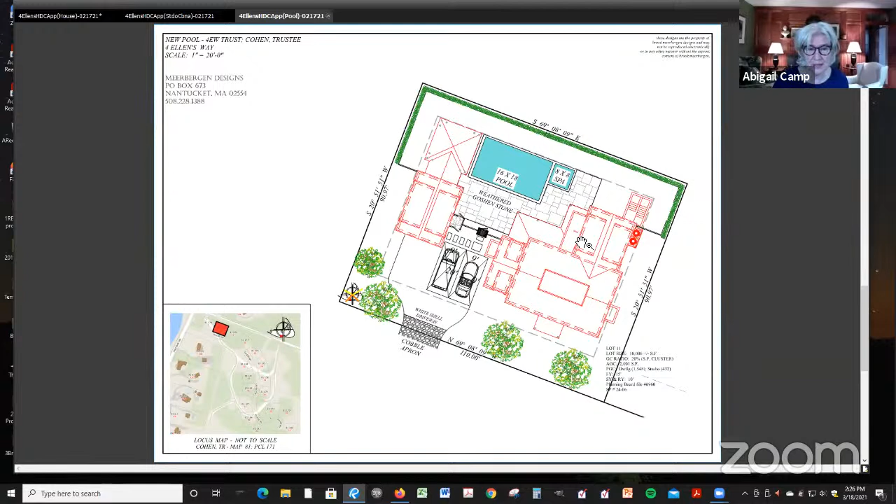If I understand this drawing, well, this is all grass right here, that's all green space. So it's really just this area that's not visible. My other concern is that a fence to screen from the road without vegetation, to me, is a bit harsh.

Well, we can throw some screening there. All right, let Abby finish. That's my comments. Thank you. Thanks, Abby.

Carrie? I agree with Abby. I don't mind all the hardscaping because it's not visible, but I do agree that that fence should be softened and planted for sort of a double screening. That's all. I would like to see some of the things that have been discussed too. So do we want to hold this for revisions?

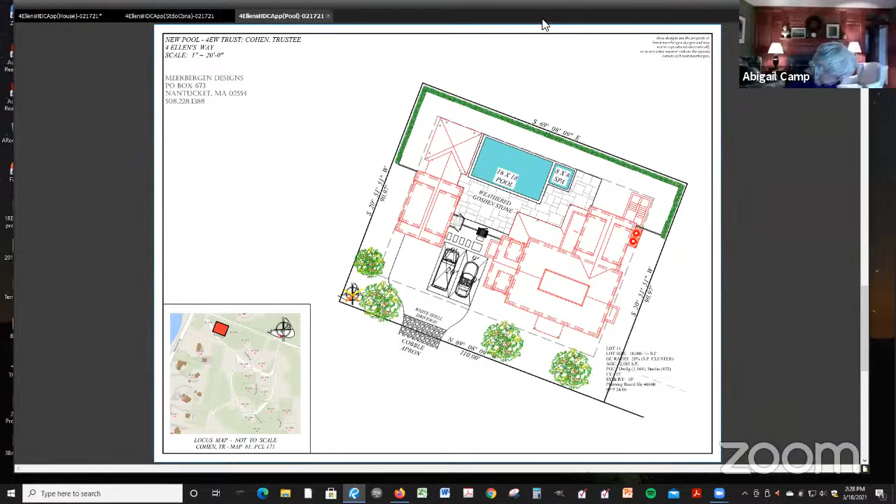Yeah, motion to hold for revisions. Thank you, Abby. On that motion, Diane? Aye. John? Aye. Very good. Carrie? Aye. Abby? Aye. I'm in favor. Motion carries.

Hey, we do have time maybe to do the Steve Roethke's 9 Coffin Street addition, if it's not too big a deal. Is it just a door change? I don't know, it just says addition. Do we have Steven on?

Yes, Mr. Chair, I am on board here. Okay, is this going to be simple or not? I do think that it's pretty simple. It's a single story extension on both sides of an existing structure. All right, let's try and keep it brief.

Same board. Oh, actually not same board. We got, now Steven is going to come on. Unless Steven, are you still there? Yes, sir. Okay, great, thank you. So let's see some drawings. I'm sure we have, this is Coffin Street in Sconset? Sconset, yes, sir. So we're going to have Sconset advisory on this.

I don't seem to have the option to share drawings here, Ray. Mine was not in the view pack, so I'd have to rely on Holly to drive the drawing piece. Yeah, Holly, are you steering the boat? It's actually Kathy today. Yeah, I am, and I'm sorry about that, Steve, it must have gotten missed. It's okay, I'm happy to have you drive, Kathy.

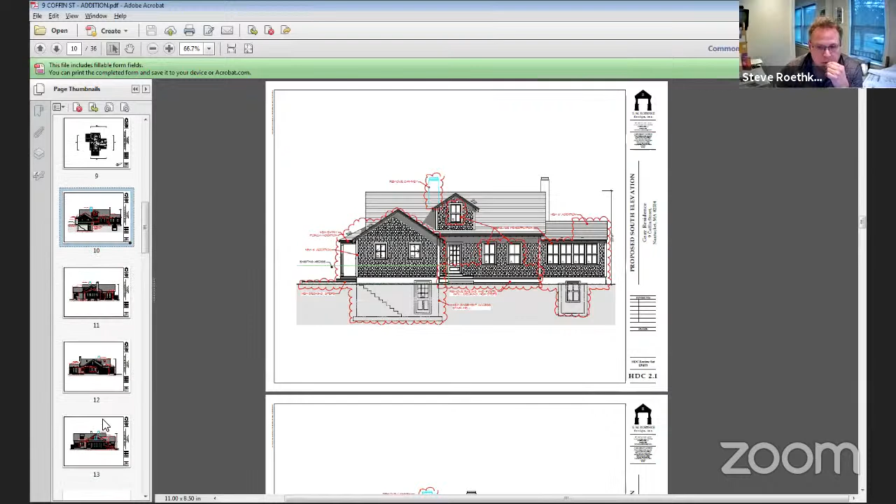On the west side of the building, which is the side where you see the driveway, and there's a little cottage in the back corner of the property, the addition sort of wraps around and creates a shallow side porch that comes out towards that parking area. And then on the opposite side, which is adjacent to Lindbergh, there's an existing sunroom there, and we're extending that about 6 feet as well.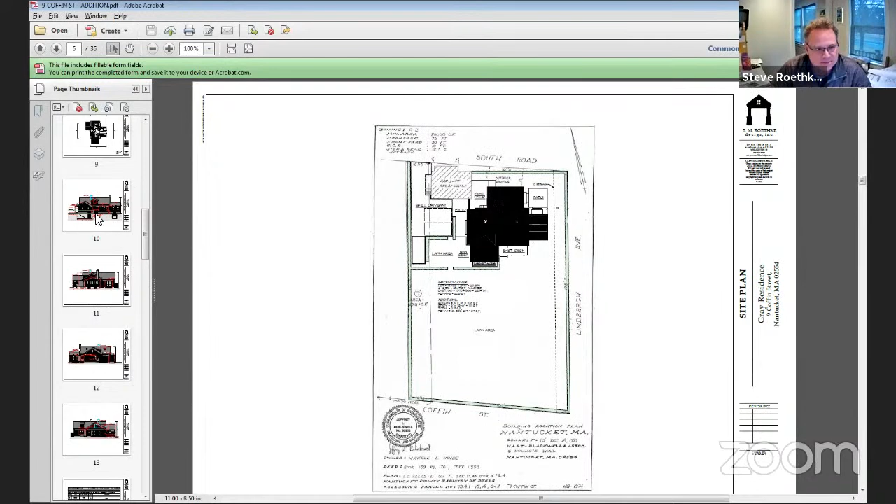So that's why I said what I said up front. We're really sort of extruding or extending some existing geometries that are there today. And I think if you go to the full-size sheets of drawings, if that's of interest, you'll get to see the side-by-side of the existing and proposed. That would be really great if we could go to the existing and the proposed.

That would be straightforward. Yeah, there we go. Now, so Holly, are you finished, Stephen? Yes, sir. Let's hear from Sconset Advisory. Yes, Mr. Chair, so Sconset, overall, there were predominantly no concerns.

However, there was a comment about the windows. There's 6/1 windows have a charm, not the 2/2s. There was also a comment about the eave details, that there should be the same details to be more harmonious between the existing structure and the addition. I want to notate for the commission that this is a 1938 structure called Island Home.

It was hard for me to discern on the site plan, Steve, about where the proposed little additions were, so I appreciate the clarification. Also, I believe there's a loss of a chimney. We had mentioned during the Sconset review of this that you will have one at least remain, and that this is not a historic chimney, but I'll leave that up to the committee.

That's correct. To clarify, the chimney we're removing is the flue for an oil burner, which is going to be swapped out for propane. The chimney that we're keeping is part of the original, actually wood burning fireplace that's going to remain.

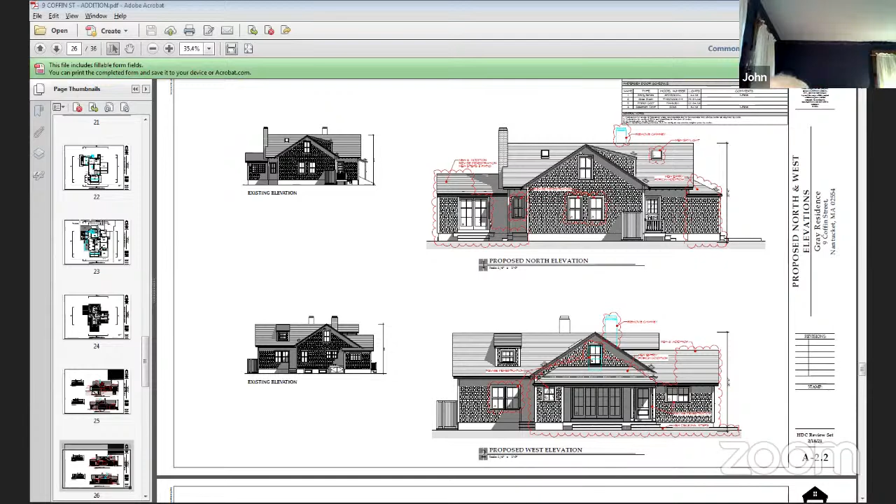Mr. Chairman, Rick, I agree with the comments of Mr. Welch on the windows. I agree with what he said on it. As far as I'm concerned, it's ready for a motion for approval.

Well, I'm not sure that would fly, and I don't think we have time, but I have nothing to add. So if I could circle back, I think we're very agreeable. I understand the context of the comments. I think we'd be fine with 6/1 on the sun porch, and I wonder if there's an opportunity to move this along with revisions through staff. I'm fine with making that change.

But I'm not sure if that was the only change proposed. What about that window in the dormer that was smaller, that got bigger, that somebody said was overwhelming? I'm fine leaving that as the existing 2/2 proportion if that's a touchy subject.

Well, what's touchy right now is they're going to shut us down and we're going to have an incomplete application. Make a motion to hold for revisions - that'll cover us, give you a chance to think about that. I think it's important, everything rather than - sorry, but I don't want this to be a problem if they cut us off.